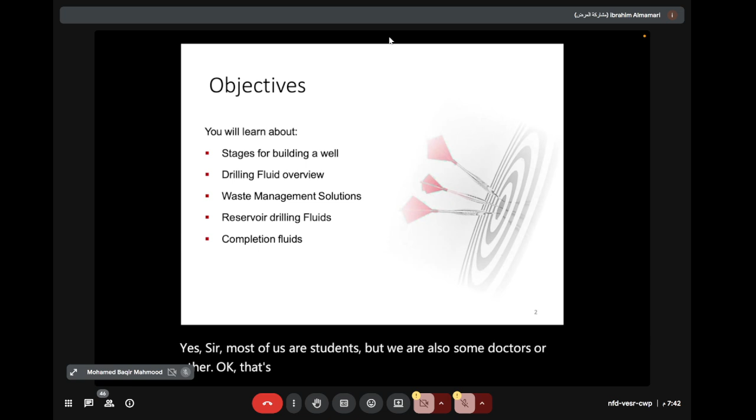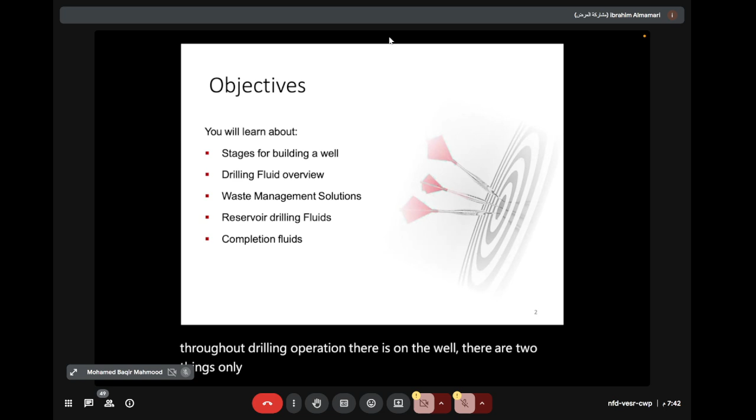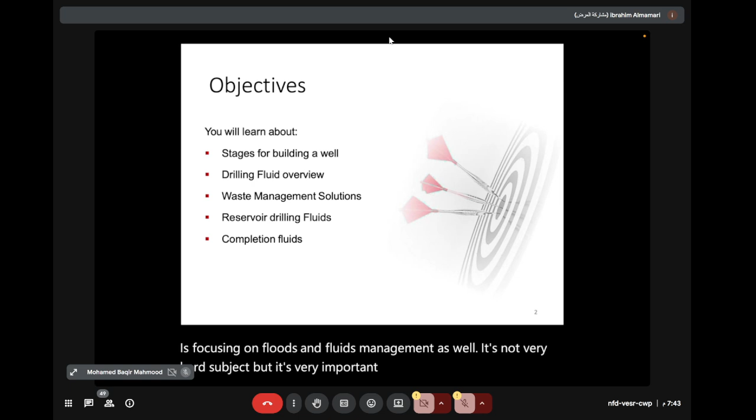I will tell you about drilling fluids, and it's very important because throughout the drilling operation, on the well there are only two things: fluids and drill string. And it's very important to know more about fluids and understand the mechanism of the fluids. So my specialty is focusing on fluids and fluids management as well. It's not a very hard subject, but it's very important, and it requires experience if you want to work at the rig site.

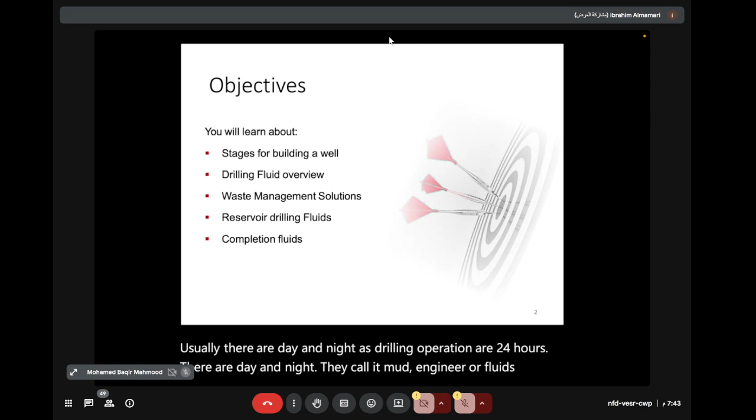Usually there are day and night, as drilling operations are 24 hours. They call it mud engineer or fluids engineer, and they are working to maintain and manage this fluid. So we will talk about the stages for building a well, a drilling fluid overview, waste management, reservoir fluids, and completion fluids as well.

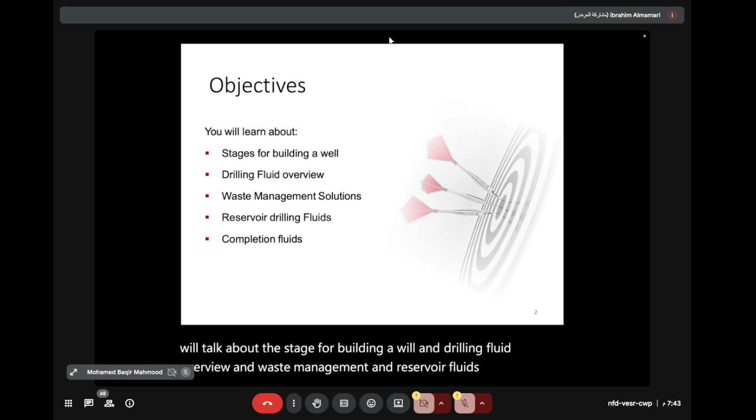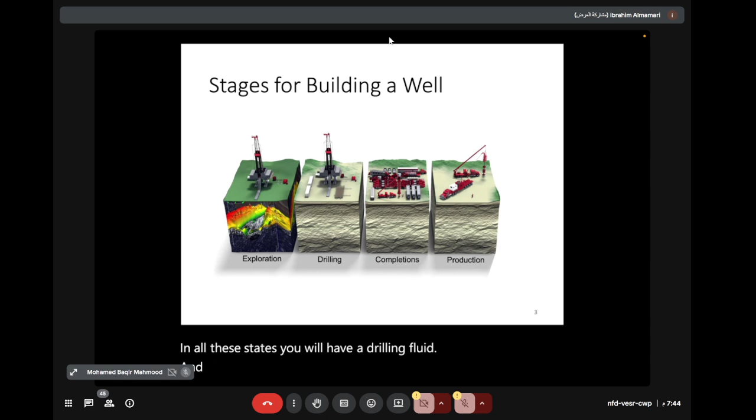So if we start from the beginning, the stages for building a well, and if you are a petroleum engineer, you should know this. You start with exploration, then drilling, completion, and at the end you will have the production. In all these stages, you will have drilling fluid and different types of drilling fluids. There are fluids used for drilling, fluids used for completion, and fluids used as a packer fluid as well.

So simply, drilling is creating a well, which is a hole in the earth, to get oil or gas mainly. But there are other reasons to drill a well as well. Maybe geothermal energy, or hydrogen as we hear right now, or injecting CO2 as well. But mainly oil and gas companies drill wells for oil and gas or water injectors. These three main things.

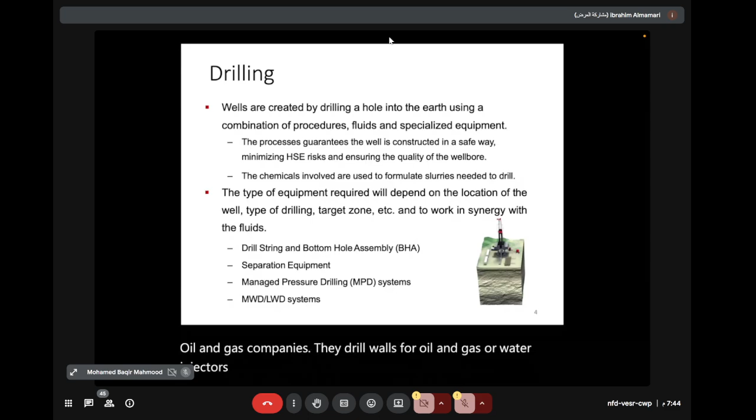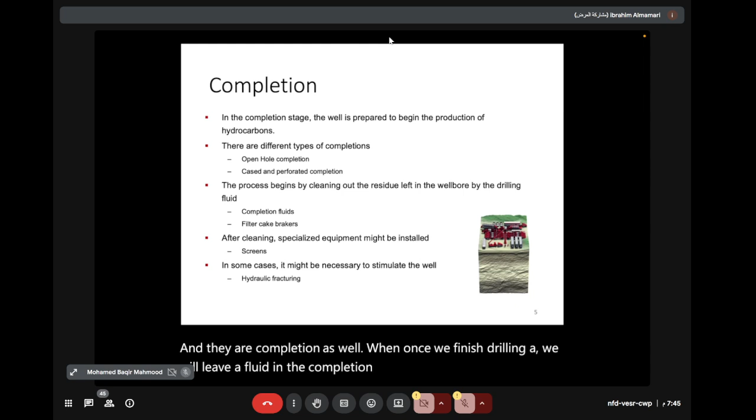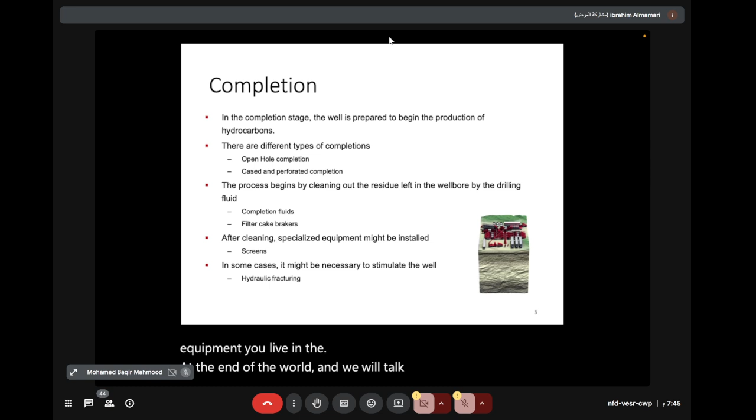And there is completion as well. Once we finish drilling a well, we will leave a fluid in the well in the completion stage, and the main reason for that is to prevent corrosion and not damage the equipment you leave at the end of the well. And we will talk about completion fluid as well as filter cake breakers. I will go just in really short notes through these slides, as I divided it into two sessions. Today we will do an overview, and tomorrow we'll go more specific.

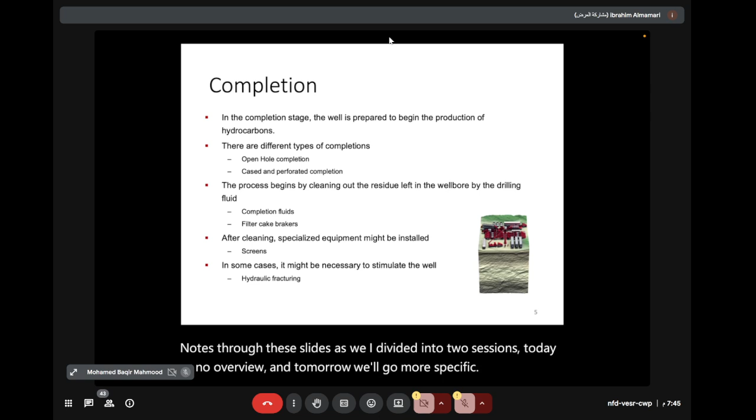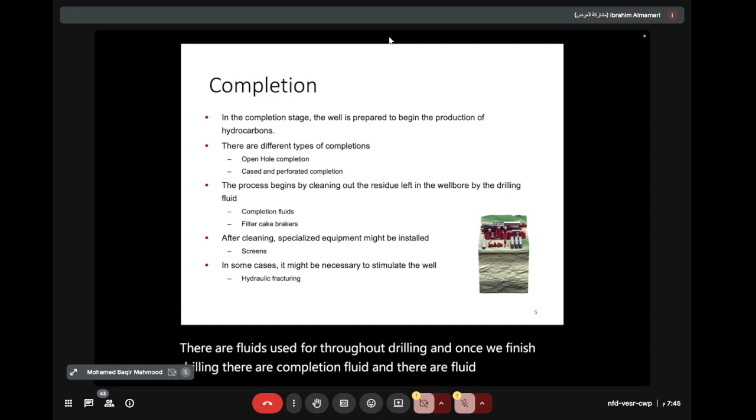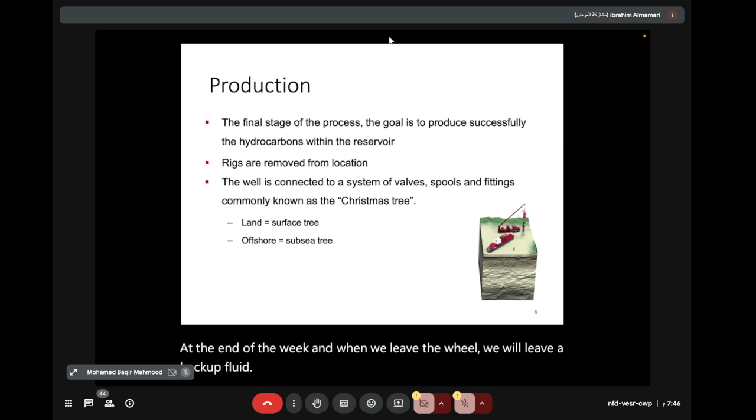So there are fluids used throughout drilling, and once we finish drilling, there are completion fluids, and there are fluids to dissolve the filter cake, as we will learn later on, at the end of the well. And when we leave the well, we will leave a packer fluid. So depending on whether drilling is on land, onshore, or offshore, you will have a surface tree, or you have a subsea tree.

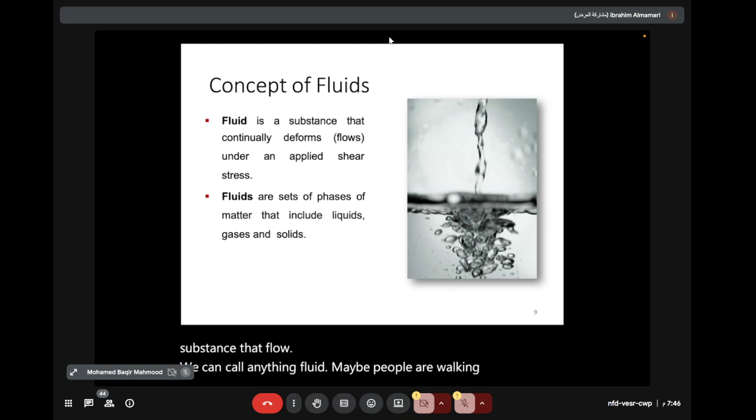Going to the drilling fluid. So what are fluids? Maybe you learned this in thermodynamics. A fluid is a substance that flows. We can call anything a fluid. Maybe people moving together in a large amount, we can call them a fluid. And water can be a fluid. Anything can be a fluid, if you understand it very simply.

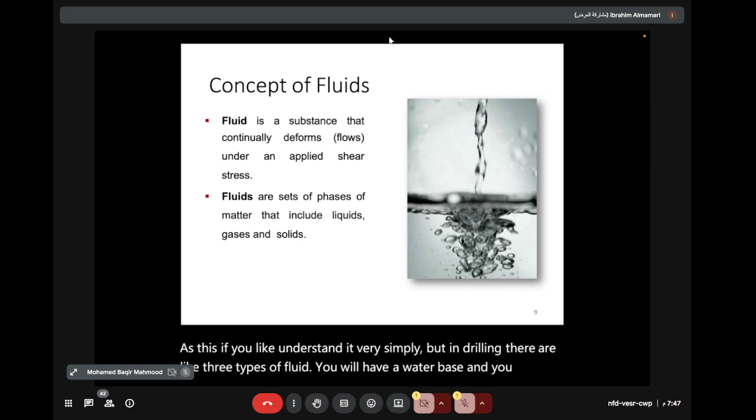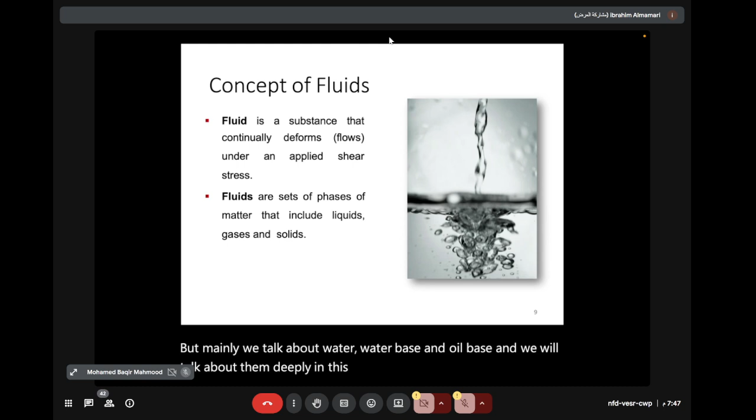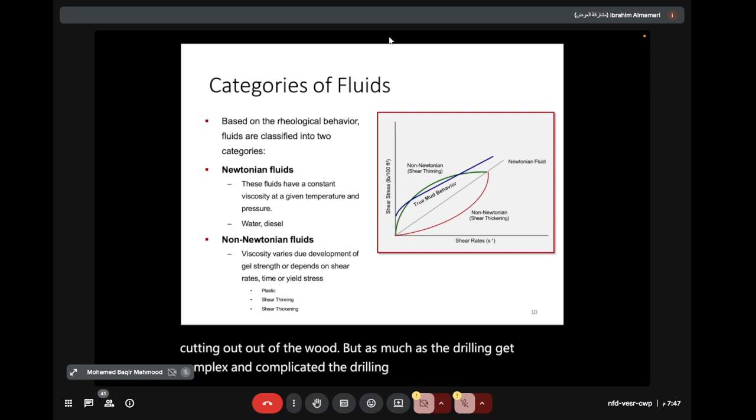But in drilling, there are three types of fluid. You will have water base, oil base, and something called air fluid as well. But mainly we talk about water base and oil base, and we will talk about them deeply in this session. In history, they started drilling wells with only water, a very simple way to get the cuttings out: they pump water into the well, and the water carries the cuttings out. But as drilling got more complex, the drilling fluid developed, with many more products and additives to enhance it.

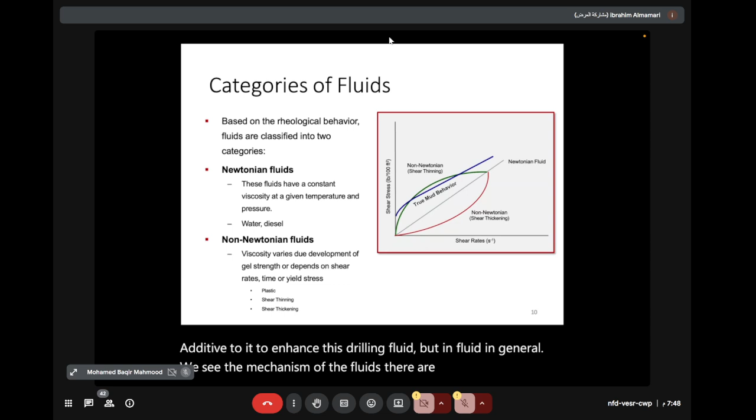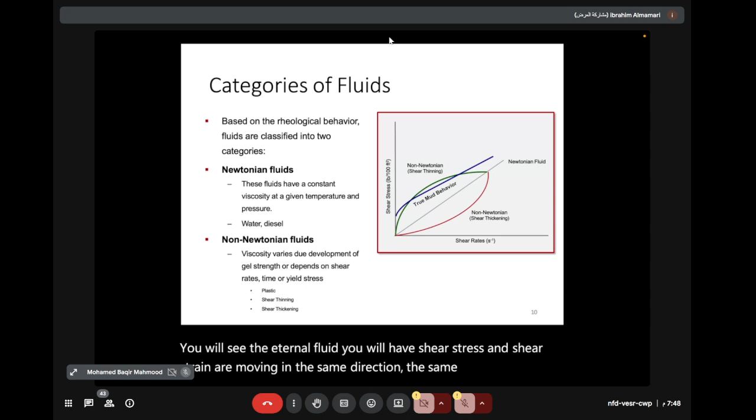But for fluids in general, we look at the mechanism of the fluids. There are Newtonian fluids and non-Newtonian fluids. In the chart on the right, they call it fluids or mud, it's the same thing. For a Newtonian fluid, shear stress and shear strain move in the same direction, the same slope. But with a non-Newtonian fluid, like plastic, shear thinning, or shear thickening, you will see a different behavior.

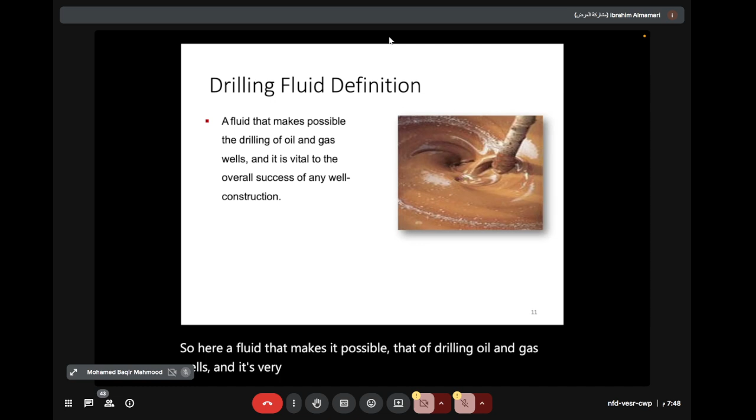So fluid is what makes drilling oil and gas wells possible, and it's very important to the overall success of the well construction. A very important thing here is rheology, the science of flowing matter. The first reason for drilling fluids is removing cuttings. If you have good rheology, which people may refer to as viscosity, you can carry the cuttings. With very low viscosity like water, you cannot carry cuttings in a deep well, or even shallow wells. But rheology is not just viscosity, it's more than that.

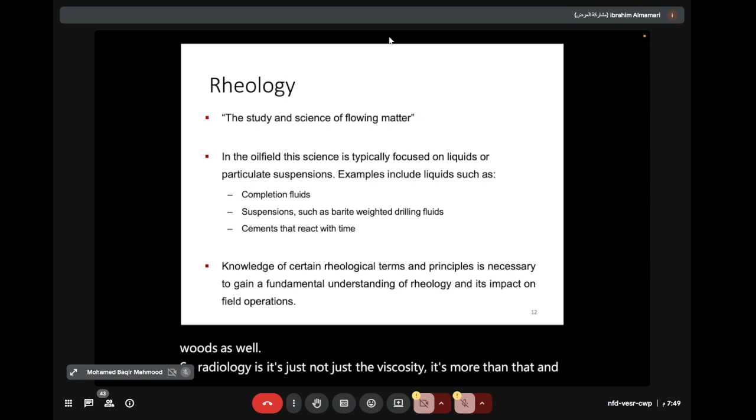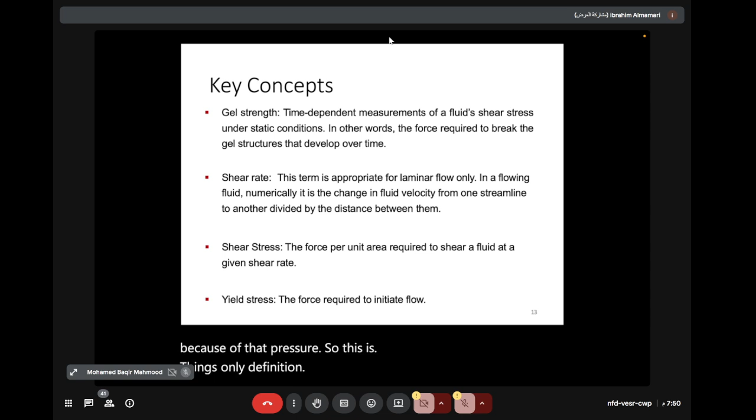You will have shear stress, yield stress, and these are definitions. But in mud engineering they're important. For example, the yield stress is the force required to initiate flow. If a fluid in a well requires a very high force to initiate flow, that's a wrong parameter. It means you will frack the formation because of that pressure. So these are just definitions, but in reality they're very important.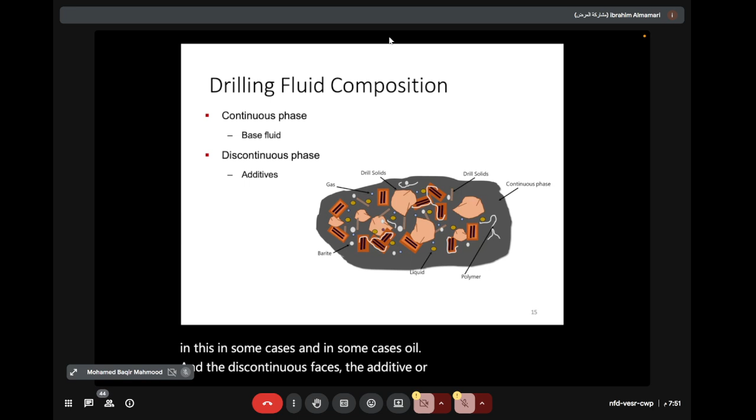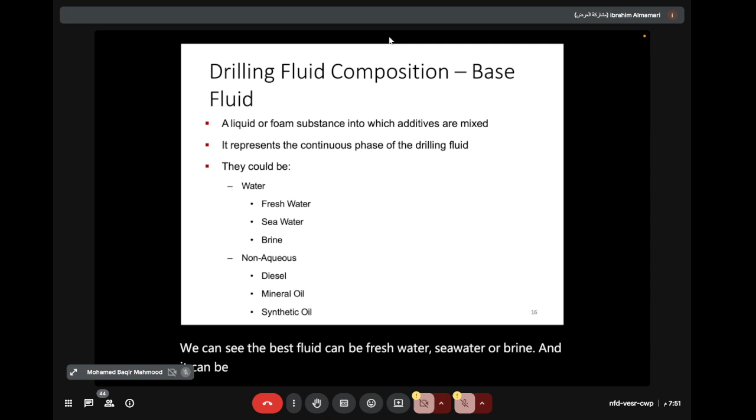The base fluid can be fresh water, seawater, or brine, and it can be diesel or synthetic. These can be the basis for the fluid. The other chemicals can be solids, liquids, emulsions, drill solids, gases. Other than the base, they're called additives, or sometimes contaminants if they're not desirable.

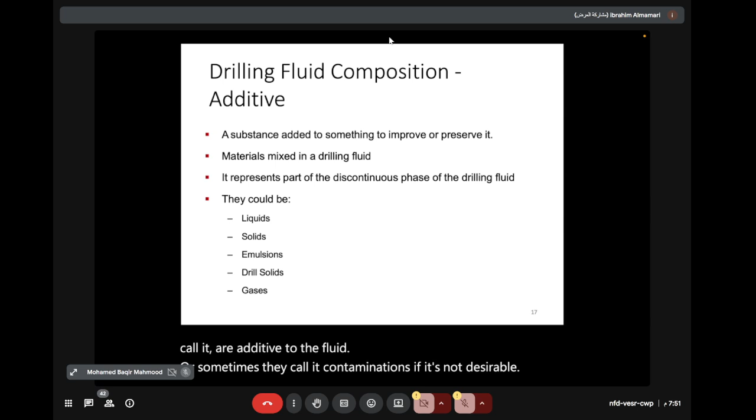Here are the functions of the drilling fluid, and this is maybe the most important slide. We can see 11, you have 4 on the top, 12, 13, 14. So almost 14 chemicals you can add to change the characteristics of the fluid, and through this we will learn about the functions of drilling fluids. So we have density and weight: we add chemicals to increase the weight.

And yeah, someone wants to talk?

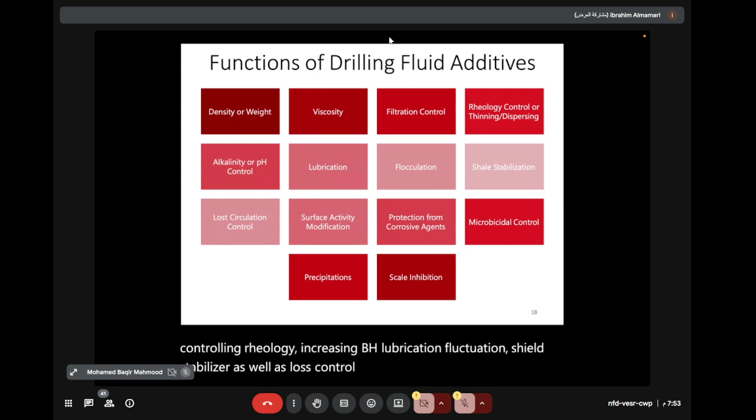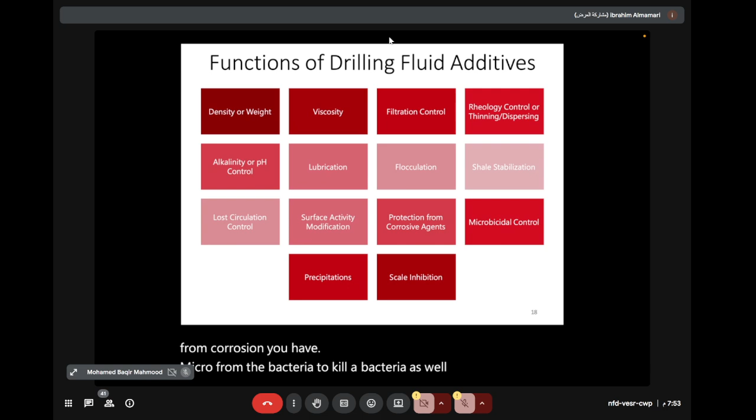Okay, I will continue. So you have a chemical to add weight. You have a chemical to increase the viscosity. You have a chemical for filtrate control. So adding weight, increasing weight, adding viscosity, filtration control, controlling rheology, increasing pH, lubrication, flocculation, shale stabilizer, as well as loss control chemical. You have protection from corrosion. You have microbicide to kill bacteria as well, and scale inhibition. So all these chemicals are added to the drilling fluids.

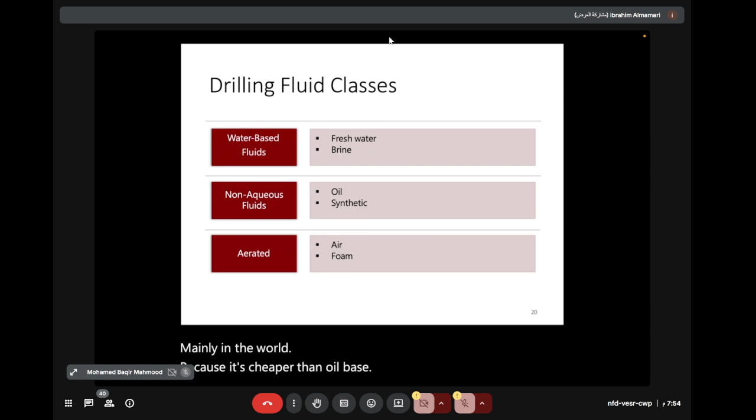As we said, there are 3 types of fluids. There is water base, non-aqueous, which is oil base, and you will have the air base or foam. And the last one is used for low density, very low density. So if we talk generally about them, water base is used mainly in the world because it's cheaper than oil base. And oil base is used for very highly reactive shale to avoid stuck pipe, and it's very expensive because its base is oil, and oil is already expensive. And for air, the main reason to use it is low density.

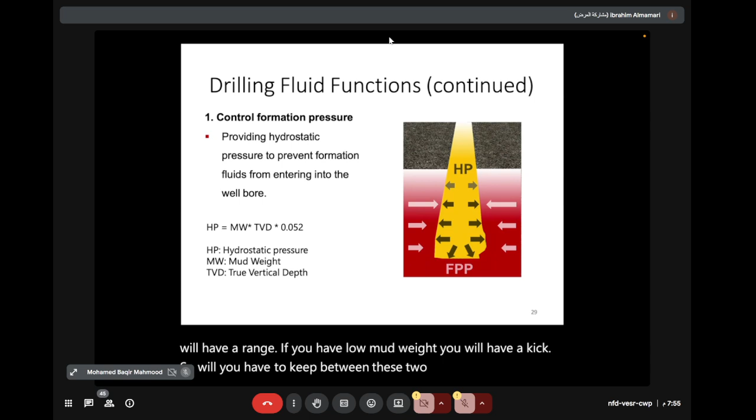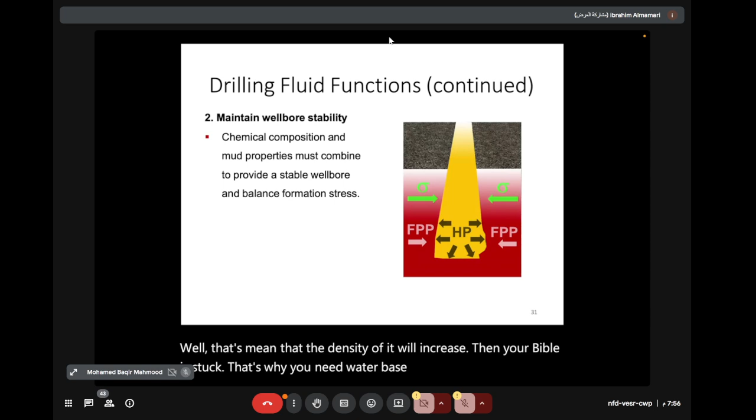Then you will have maintain wellbore stability. We discussed we have 3 types of fluids. There is OBM. Why do we need OBM? It's the main one to maintain wellbore stability. As well, when you have a water base, you will have a chemical shale inhibition to do that. That means if you are drilling, for example, reactive shale with water, it will swell, meaning its density will increase, then your pipe will get stuck. That's why you need it. It will maintain your wellbore stability. This is the second one.

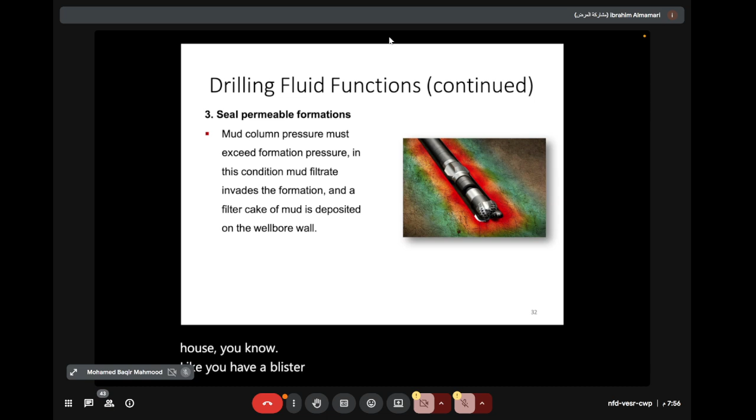The third one, seal permeable formation. Permeable formation will cause you losses and will cause you stuck as well. So you will have filtration control, very good filtration control. You will have like plaster in the well, like plastering a new house, so you will have a very smooth wall of the well. That means it will not collapse. This is the third one.

The fourth one, minimize formation damage. When we drill a reservoir, we have oil, we have a permeable formation, and the drilling fluid ensures to maintain this feature in the formation. So once you finish drilling, you will not damage the formation, you will not block these pores, and you will have a filter cake fluid to do that.

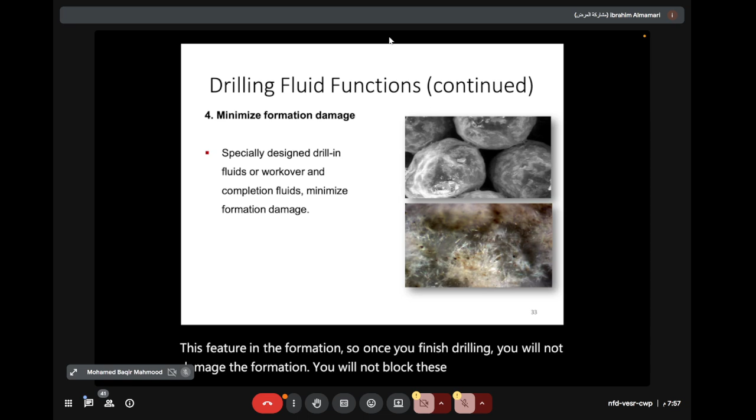The fifth one, cool, lubricate and support the bit, and it's good because the bit cannot move without the drilling fluid, and it helps cool it as well as lubricate it. And there's a chemical added to the drilling fluid to lubricate throughout drilling, so reducing the torque.

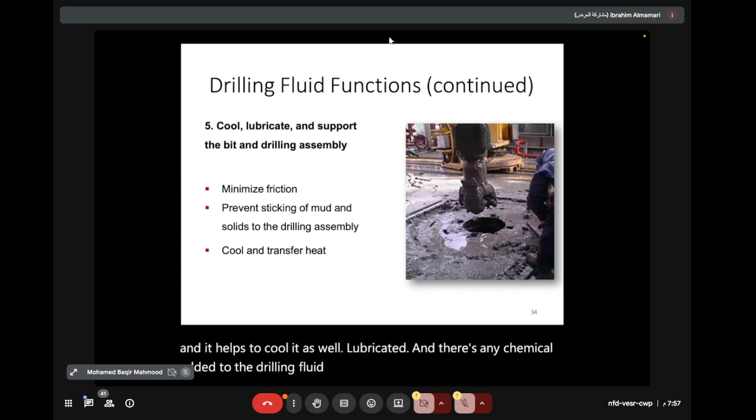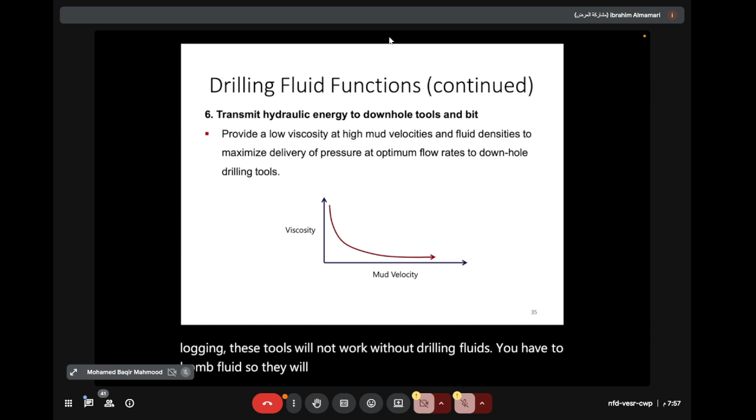Number 6, transmit hydraulic energy to downhole tools. I don't know, guys, if you learned about MWD and logging, but these tools will not work without drilling fluids. You have to pump fluid, so they will generate the data and transfer it to the surface. And as well it helps these tools get the data for the well, like gamma ray, resistivity, density, all transmitted throughout the drilling fluid.

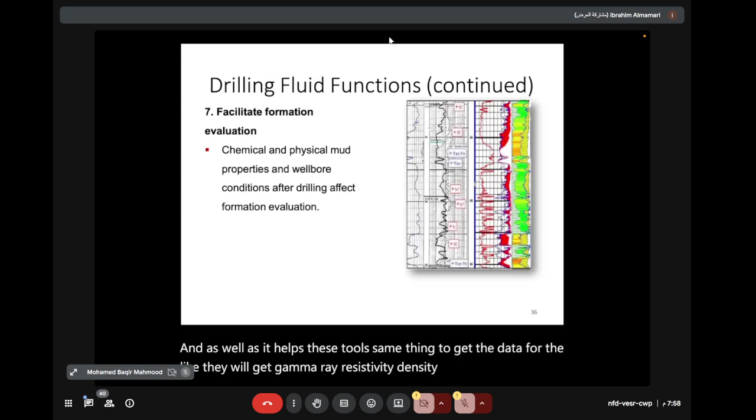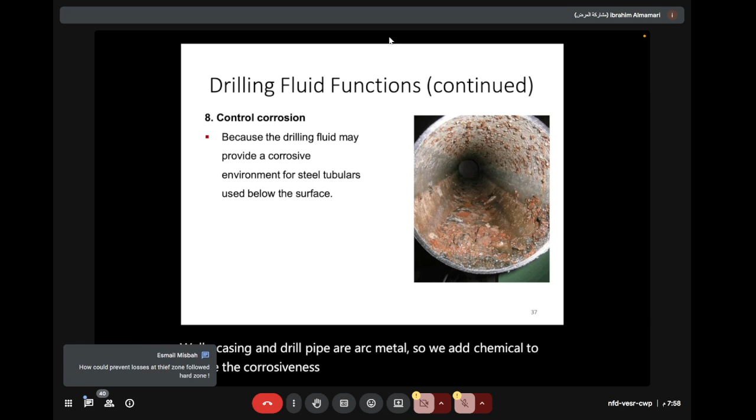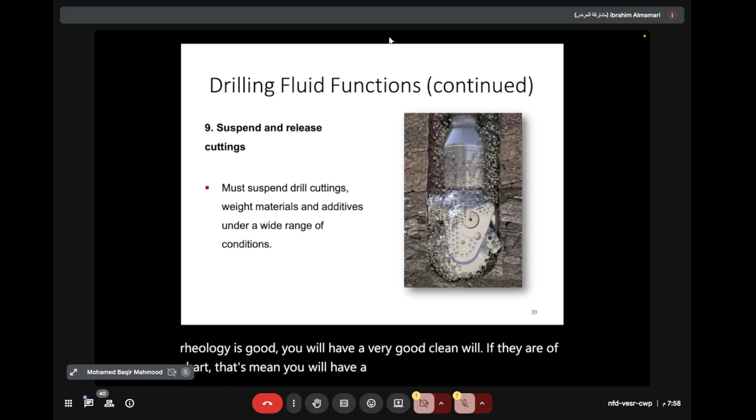Number 9, suspend and release cuttings, which is hole cleaning. Very important. If you have good parameters, your viscosity, your rheology is good, you will have a very clean well. If they are off chart, that means you will have a problem accumulating these cuttings. Number 10 is remove cuttings from the well. We'll talk as well about solids control really quick.

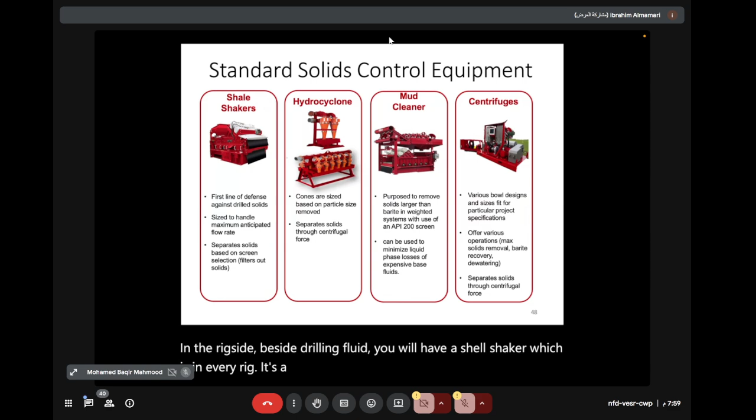At the rig site, beside drilling fluid, you will have a shale shaker, which is in every rig. It's a must. The shale shaker runs drilling fluids through different screens to separate them. You will also have hydrocyclone, mud cleaner, and centrifuge. Centrifuge is the lowest one.

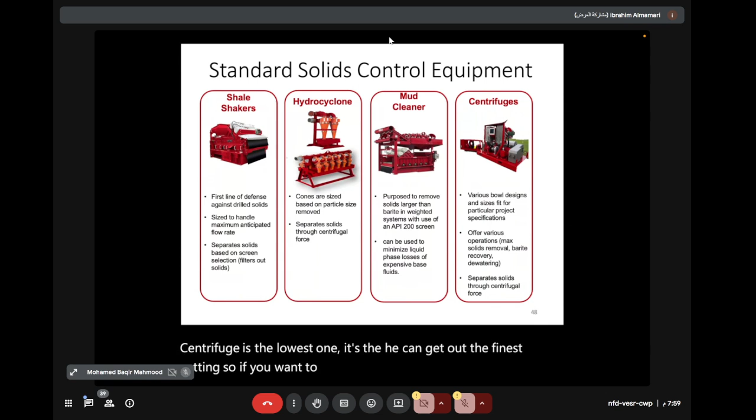It can get out the finest cutting. So if you want to separate cutting from the mud, centrifuge is the best for getting the finest size.

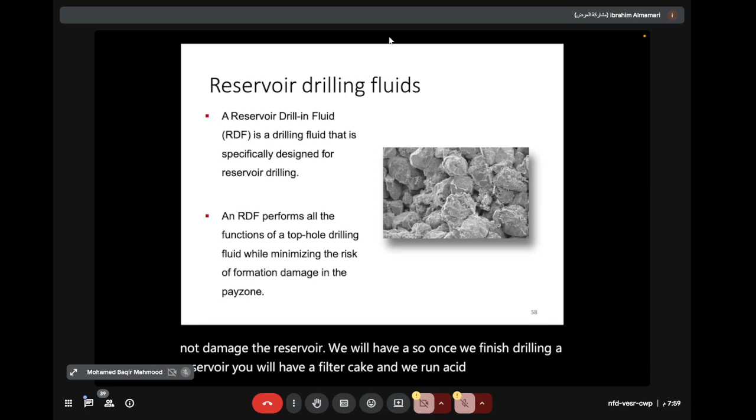We talked about drilling fluids in the reservoir, as it will not damage the reservoir. We will have a filter. So once we finish drilling a reservoir, you will have a filter cake, and we run acid, and it will eat all the filter cake, and all the pores will open to produce from the well.

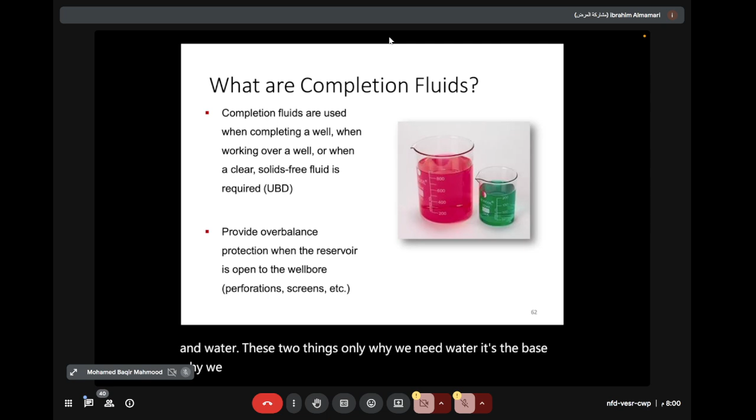Completion fluids - once we finish drilling, we use completion fluid, and completion fluid is basically brine, which is salt and water, these two things only. Why do we need water? It's the base. Why do we need salt? To have the required mud weight. The characteristic of completion fluid is that it will not damage the formation because there are no solids in it.

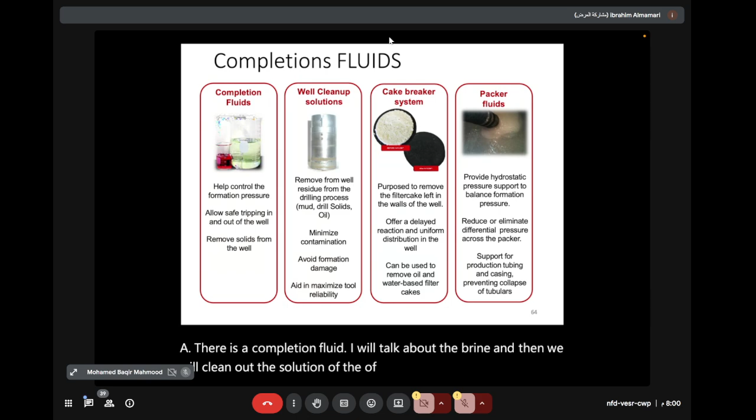There is completion fluid, we talked about brine, and then we will clean out the solution of the filter cake after drilling. Then we will put in the well a packer fluid, that's for corrosion inhibition. That's the packer fluid - it's the fluid that stays between the tubing and the casing.